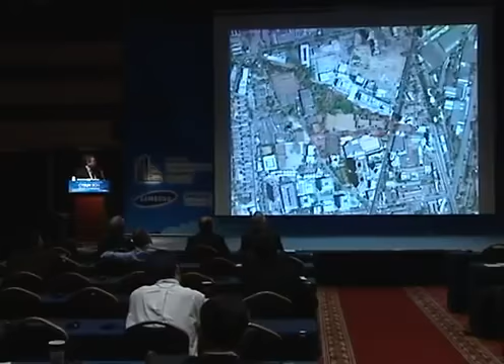As we found our site in early 2009, you can see the mill facilities still there, and indeed, when we walked onto the site only a few days after our client gained access, after closing all of the real estate issues, we found really striking and interesting circumstances, literally left the way it was the last time the place had operated. And of course, visually arresting circumstances of nature and building combined. And the city, of course, had grown around it, thriving, quite dense, quite populated.

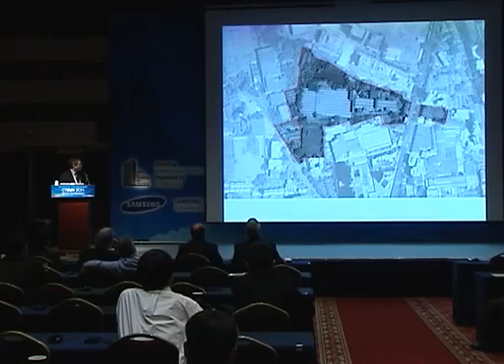And this characterizes the development situation in Mumbai generally, whereby tall buildings are sprouting like weeds amidst former mill buildings, most of which probably have the same fate. Not a lot of organization, not a lot of planning, not a lot of logic to how the city works. And I talk about this because our efforts at building tall buildings deal with structural issues and technology and the engineering of it, but we have a deep commitment that tall buildings have a special responsibility not only to make a statement on the skyline, but actually make a positive impact on the life of the city as they meet the ground.

So this is the site plan for the 17-acre site. The program for the site as we started involved somewhere between 7 and 8 million square feet of building, largely residential, also mixed use, a lot of parking. And what we found as we started looking at this site is that it's extremely well located relative to Mumbai, but it has quite a small amount of frontage actually on streets.

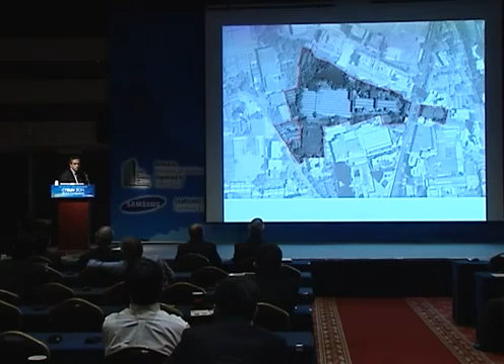And we talked with our client about how to approach this issue and essentially said, well, this is a very good location, but it's not a place. And with our interest of contributing to the life of the city and also utilizing the site quite efficiently and making the most real estate value for them, we actually made one very important move, which was to strike a road or a street or a boulevard across the site, and to say that this is the place, this is actually the identity of the place.

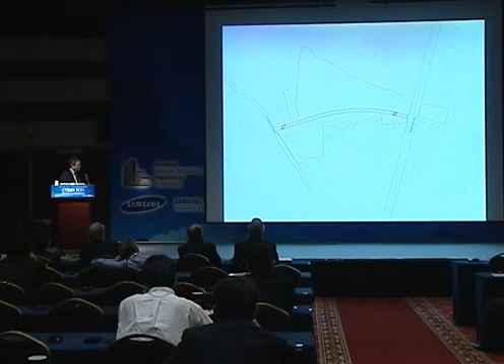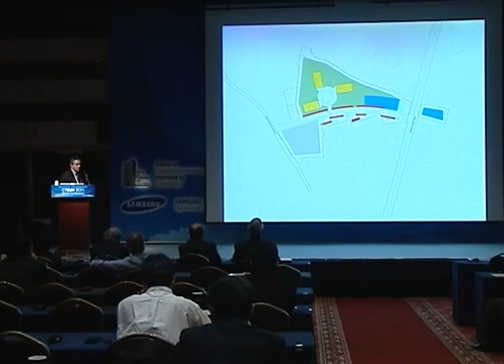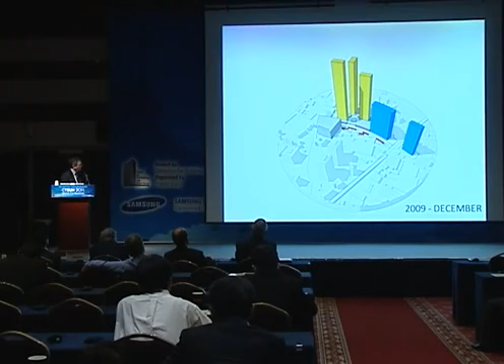What that also does is divide the site very cleanly and very effectively into a zone which can have public uses, parks, retail, street life, active street frontage, and still maintain quite a bit of space necessary for the actual mixed-use development itself. And the master plan, as it completed its initial stage, with the designation of 3 already quite tall residential buildings, a group in yellow, mixed-use buildings in blue, the red indicating retail and street uses, and the green indicating public park.

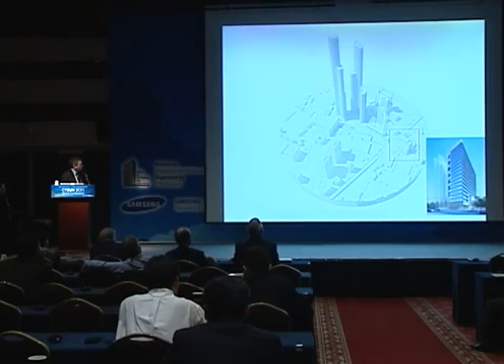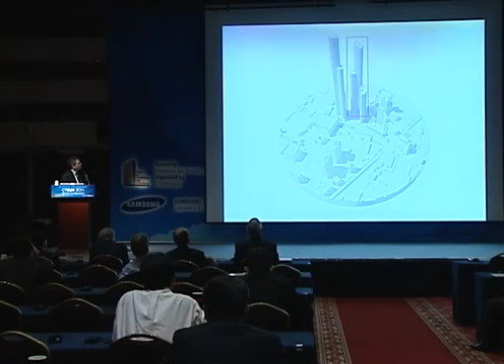Fast forward about a year of design into a variety of buildings, and we still have the beginning of the development of a street life which connects the whole complex to the city, a boutique office building about 250,000 square feet, a mixed-use tower which is currently in schematic design, and of course a group of residential buildings, residential towers, the tallest of which is World 1, which is primarily the subject of

the presentation. But it's important, from my point of view, to go through how the site works and how, in particular, the density of the site required a response that couldn't start with the tall, iconic building that the client wanted to build. It had to relate to something. So how did it get to be the way it looks, and you're seeing in the three-dimensional images more or less the final design which is under construction.

And it's interesting, I think, in the context of Adrian Smith's comments this morning about his interest in the three-leg plan and the sort of lineage through architecture. We didn't start here. We didn't quite back into it, but it was more the confluence of a very dense site which needed to accommodate a whole lot of apartments in conjunction with structure and other kinds of considerations.

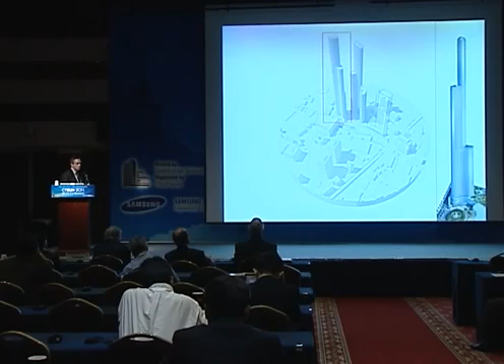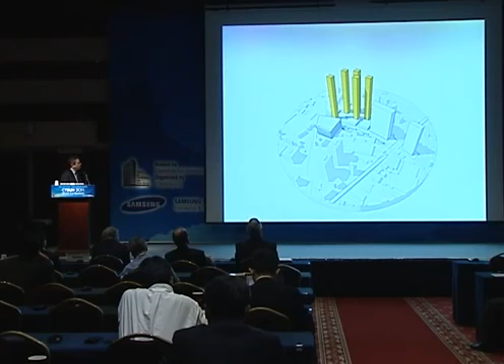Along the way to finding our way to that solution to the residential development in these towers, of course, we looked at different typologies, a typical 90-foot square point tower. We looked at mid-rise, which really wasn't so mid-rise because of the sheer amount of housing that was trying to be put on the site. We looked at mixtures of high and mid-rise, but essentially came back to the answer I think we always knew, which would be that this would be a group of tall towers. Already at this point, also indicating that there was one special and dominant tower among the family of 3.

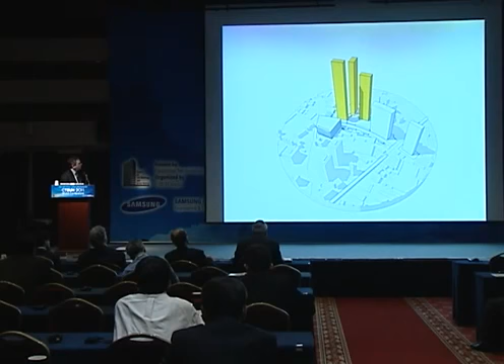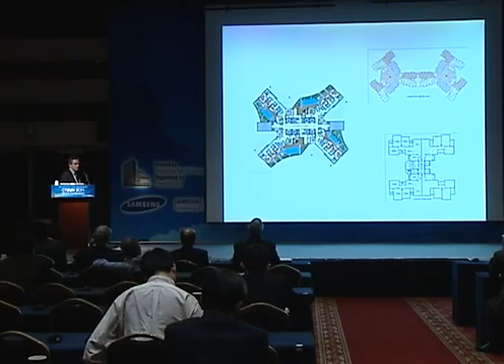Now, to take this diagram, which is a bit generic, and turn it into what it needed to be in the context of Mumbai, we spent a good deal of time looking at some local precedents. These are floor plans from a variety of typical high-rise buildings in Mumbai from the early to mid-2000s, in which we drew a few early conclusions. One was that almost all these buildings were the logical maximum extrusion of lower building typologies. Single groups of elevator banks, no high-rise and low-rise, building aspect ratios, in terms of this one in particular, which couldn't really be extruded any further.

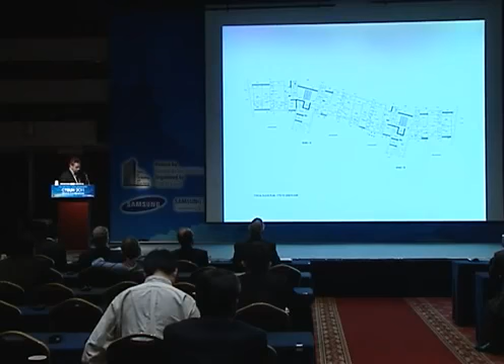We also found, by and large, and this is not a surprise in terms of buildings that are 100% residential usage, that the buildings are designed almost entirely from the inside out. And so there were a lot of aspects of this, knowing the density and the height that we were going to achieve, but also the aspirations of building an iconic building on the part of our client, that we knew could not apply to what we were doing. And so we had to begin to make a new typology within this context, which certainly wouldn't be the kind of typology you would find somewhere else in the world, but also wasn't what you already found here in Mumbai.

But at the same time as we knew that we had to make improvements, we also knew that this inside-out design approach and our clients' and their competition's very clear sense of the residential market meant that we had to look at these quite closely, and that we had to find a number of ways of achieving things that are actually quite desirable about these buildings. Many of them have floor-through units. Many of them have extensive balconies. They're actually, in many cases, quite large units. And so we took these typologies and began to make our own prototype. Generic in terms of what it predicted as architecture, but embodying a number of aspects that we thought would have to carry all the way through.

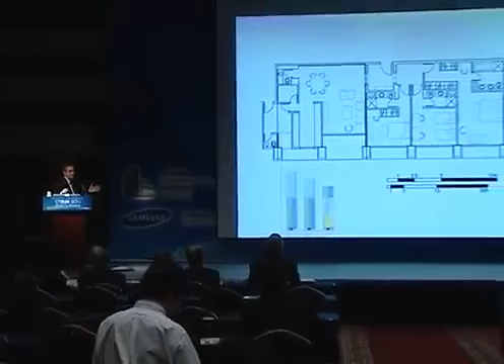The size of the apartment is extremely important. There was a very small range in which the apartments could be judged to be marketable, meaning they had to be at just the right size, just big enough, but not too big to fit certain area ranges.

The buildings that we looked at as precedents almost entirely had bathrooms that were at the exterior, which is fairly typical in Mumbai. Because of the density on the site, we knew we couldn't waste space on the outside, and so we made an early decision that they would be interior, which was, it's not a huge breakthrough, but it is different from what was the norm.

These are high-end apartments, and our client wanted balconies in every single room. Relationships between family and public space, servant space, service, all had to be kind of respected in a way that in most of the super tall buildings we look at, we find a mixture of uses, and that's the way in which shape and appearance begins to be changed from bottom to top. In this case, we had very discrete building elements, and we also had a circumstance in which a taut curtain wall, for instance, was not going to be the solution.

We also knew, and this is sort of the key that started us into actually finding a suitable building form, that these diagrams at the bottom are actually Excel charts, and the pro forma was such that when we started to deploy this on the site, it became clear rather quickly that we needed 6 units per floor at the bottom of at least 2 of these 3 buildings. And so, knowing the size of the units and that we needed 6 of them, we knew we needed 18 bedrooms, 6 living rooms, 6 kitchens and service areas per floor.

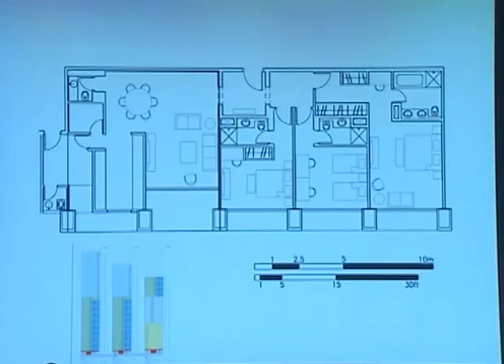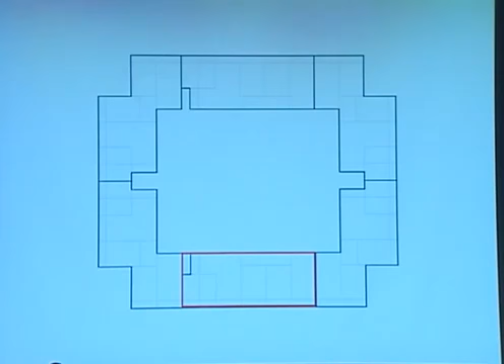And we started to do a kind of calculus where we take that prototype unit in red, start to imagine how cores might work, and they didn't want more than 2 apartments entered from 1 set of elevators, an additional complication. We started to do a kind of calculus of, well, if we need that much perimeter and we have to figure out a logical core, what are we going to do? And of course, that's how, between site and program, we ended up with our 3-leg plan, with an idea that structurally this would also have advantages as we moved forward.

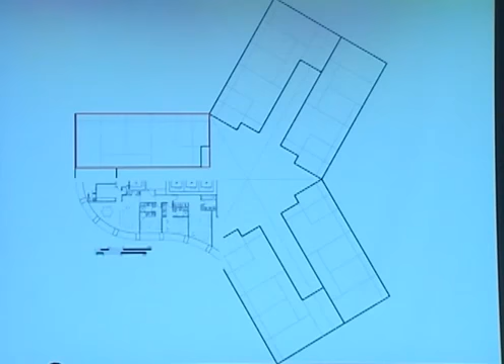And so you can see as we begin to take that diagram and start to put the shape in it that you saw in the building itself. And so we had a scheme, let's say, at least for the plan of the building and the basic volumetrics of the building, but we didn't have a structural scheme yet.

We made the early proposition architecturally that a cage of closely spaced columns at the perimeter with proper connections to the interior was a likely approach to deal with lateral forces and to be consistent with what we needed to do in terms of residential plans. And of course, the strength of concrete normally used in a place like Mumbai isn't particularly high, and those columns at the bottom of the building were quite big. We looked at embedding steel in the columns, which had a very marginal reduction in the size of the columns, and fairly quickly rejected that as an approach for its complexity in construction.

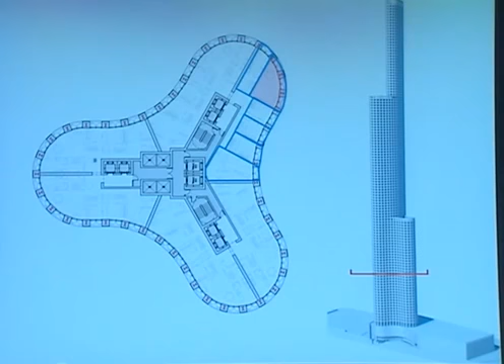But during this time, we also had quite refined the actual unit plans, to a degree that we were quite happy with them, and our client was happy with them in terms of all bedrooms essentially having full-length windows and balconies at their edges, and the payoff of a shape like this, which was that the living rooms and dining areas were at the perimeter.

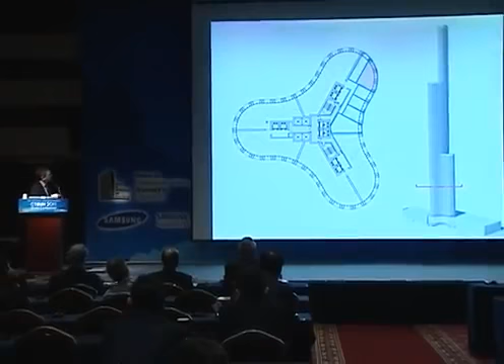Now, of course, none of us liked the two giant columns that were in that living room, and so at this point, we told our structural engineer that they were being too polite and too cautious with us and sort of taking our lead. And I said, you know, forget everything you know about this except the shape of the building and the volumetrics, and what would the perfect structure be.

And we sort of had a sense of what the answer might be, and of course it was 6 mega columns, and Bill can describe this better than I can, 6 mega columns connected to the core in a strategic fashion. But of course, given the calculus that I talked about before in terms of needing a certain amount of perimeter, this was effectively taking 6 bedrooms out of the mix, and so the building didn't work anymore.

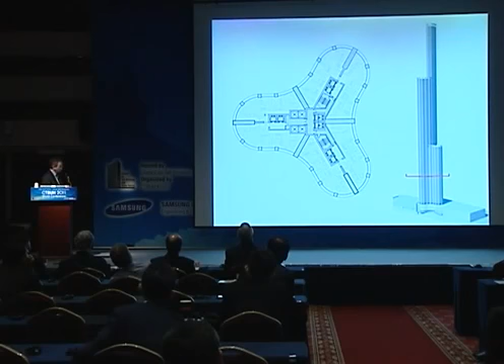And we played with that further, for instance, to say, well, maybe we could configure it a little bit differently. But those are still actually quite large, and we were losing floor area in a place where we couldn't afford to lose floor area relative to residential plans. And so, given these and what we were working with, and you've also seen this sort of evolving in 3 dimensions as I've shown the plan, we started talking about a hybrid system and what the possibilities would be.

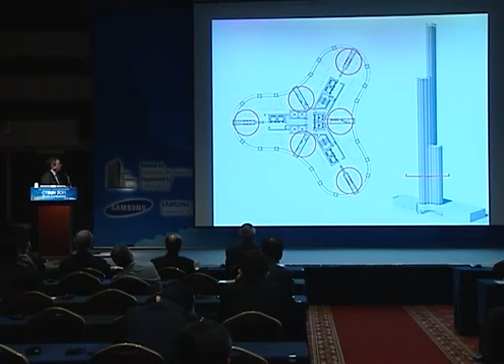I'll go past that. So what we ended up with as an approach that works very well for structure and very well for the apartments is actually a sort of hybrid megastructure in which we gathered 6 columns in the concave surfaces and gathered 3 in the convex surfaces, and we're able to open this area up with a single small gravity column which gets taken out at each tier.

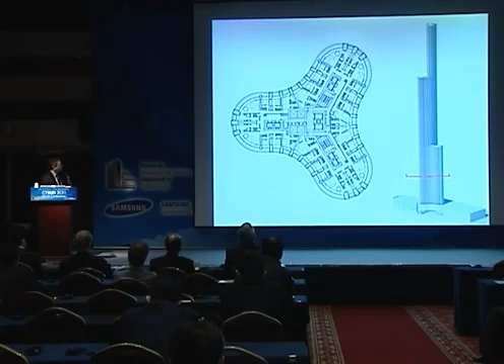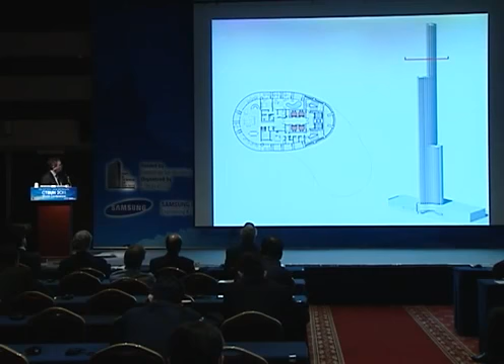The result of that visually for us was quite exciting and quite important in that the gathering of the columns, 6 columns in the concave, leaves one column, the single visual element, which goes from top to bottom in each tier at the inflection point. Tier 2 plan working with the hybrid structure, and Tier 3 in which there are duplex apartments occupying the entire floor plate, and some images of the building where you can see the effect of the gathered columns, the stretch, and the columns at the end, in a way energize and enliven the form in a way that our initial ideas couldn't do. A few more images quickly.

And several views inside and out showing how the living rooms and bedrooms work relative to structure. At the living rooms in the lowest tier, the second tier with larger apartments and a living dining area with a panoramic view, and then at the very top of the building there are, I think, a dozen of these duplex units where the payoff of the structural configuration is especially welcome. And on the skyline, and now for real substance.

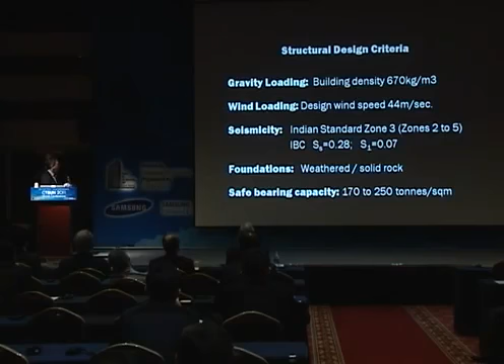Well, I don't know. I thought that was a lot of substance.

Well, Jay has made the premise to you that together we've created a building that works well from an architectural perspective, from a structural perspective, and is well integrated. I think in the last slides he showed you, in some sense the architecture speaks for itself, of course, but let's look and see how well we did. So this is just some basic data that particularly the structural engineers out there can sink your teeth into. The first line basically tells you that in Mumbai, for a variety of reasons, buildings are quite heavy. So you have a really dense, heavy building to start with.

Wind loads are pretty comparable to here, maybe a little windier than here in Seoul, New York, very comparable there. I would say that the speeds that are listed are, by some opinions, conservative. Seismicity is moderate. It's in the middle of the range of the Indian spectrum. And in IBC terms, for those of you who would speak that, you have some data there in terms of IBC. It's more or less, again, comparable to New York, I would say.

In terms of foundations, Mumbai is a mixed bag. It's former islands filled in, so depending on where you are, you have different conditions. But generally, if you go deep enough, you hit really good rock. So we had a combination of weathered rock and then solid rock down maybe 30 meters.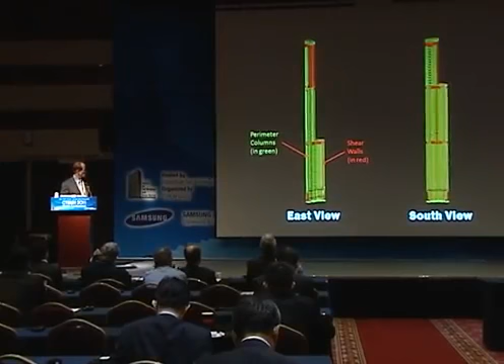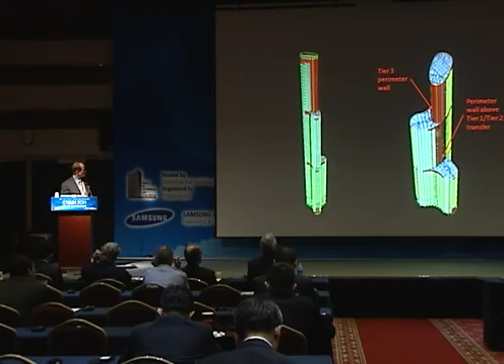In terms of the structural system, some of the images Jay showed you give you a pretty good idea. Here's a few more. Obviously, the grouped perimeter columns. You see some shear walls, which are along the splines, like some of the other buildings you've seen today. Additionally, there are some walls on the perimeter that overlie where the one tier sets back below, on the tier below. Not as well organized as some other buildings, but still a system that allows us to deal with the stresses that occur at those intersections.

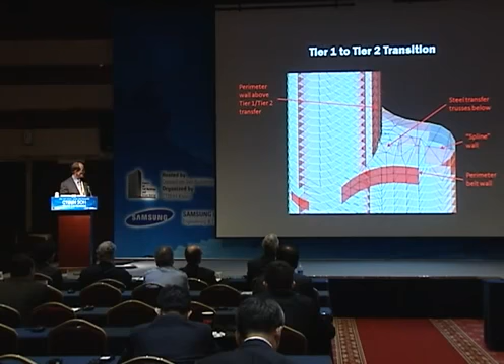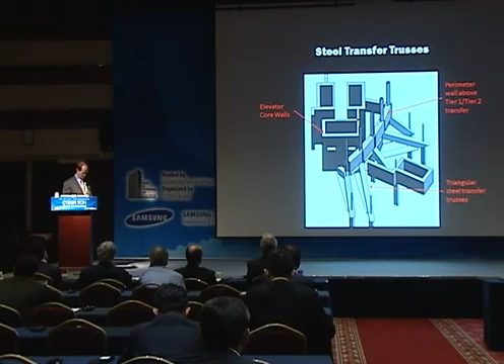Here's the more difficult one, the tier 2 sitting on tier 1, and we'll just go inside a little bit because the wall that goes across the top of tier 1 is transferred out by a series of simple 3-piece trusses, steel trusses. We try to use as little steel as possible in the Mumbai market. It's seen as a significant premium as well as something that the local contractors at least do not have a lot of good experience with.

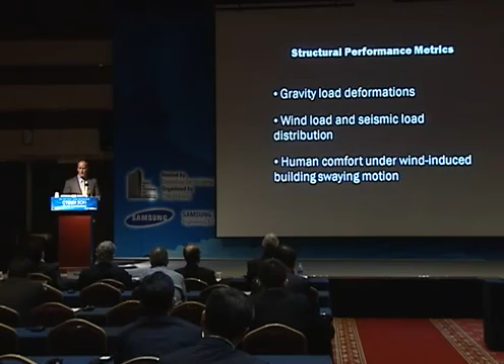In terms of the metrics for how we did, I thought these were some of the more important ones. In a tall building, as others have said today, obviously keeping the differential shortening of the individual columns and walls to a minimum is an important consideration. Dealing, of course, with the wind and seismic loads, and then achieving the requisite level of human comfort in the wind.

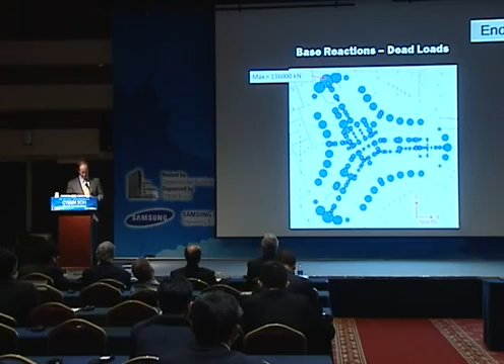In terms of the magnitude of the load, the most heavily loaded column under gravity is 136,000 kilonewtons. That will be a reference point for these other slides. Now, if we look at the wind, you see a pattern which represents that the whole of the building is acting together. You see the peak stresses, the blue, the largest compressive stress due to wind, and the white circles, the largest tensile stresses due to wind alone, are at the perimeter, and there's again a relatively gradual distribution between the perimeter and the middle and to the other side.

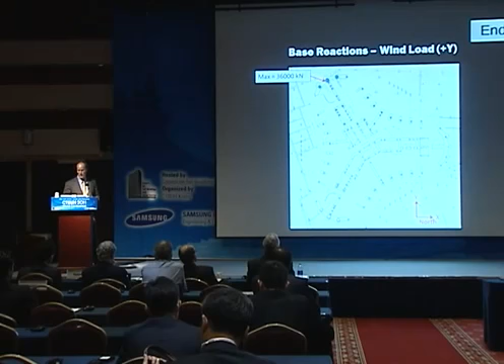The magnitude of the wind load now 53,000 compared to the 136,000 you saw on the prior slide. So the wind loads are large, but there's no tension at the bottom of the building. Same thing, different wind direction, same sort of conclusions. In terms of seismic, another point of reference in terms of the numbers, 24,000 kilonewtons. So as with some of the other buildings shown here, in a moderate seismic zone, the wind load is basically double the seismic excitation.

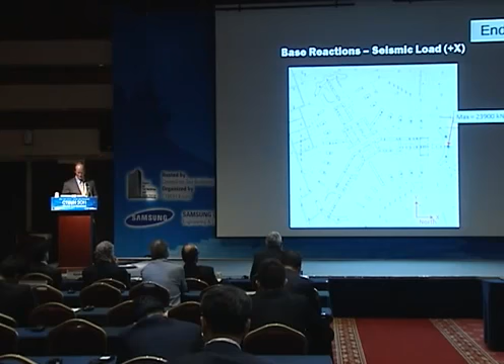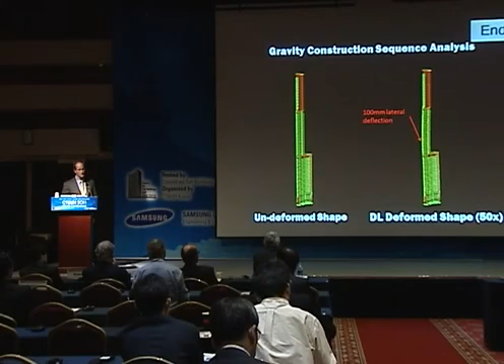In terms of the deformations of the building under its own weight, this is the results of a construction sequence analysis where, as is typical, you generally get the largest degree of lean in the building associated with differential effects at more or less partway up the building. 100 millimeters is not a bad value in my opinion.

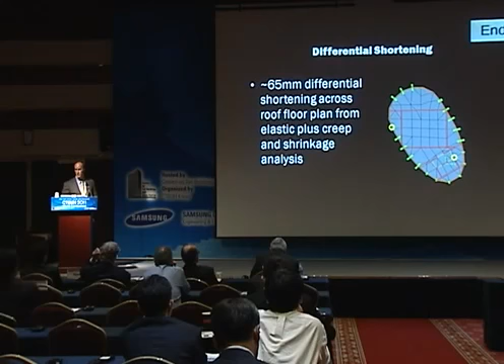In terms of differential shortening between individual columns, if you go to the roof and look at the relative values, the greatest difference is between the 2 points circled, which are a significant distance apart, and the differential, including all long-term effects, is 65 millimeters. So again, I think a quite acceptable result. In terms of wind load deflections, a relatively normal degree of stiffness has been achieved. The deflection is the height over 495.

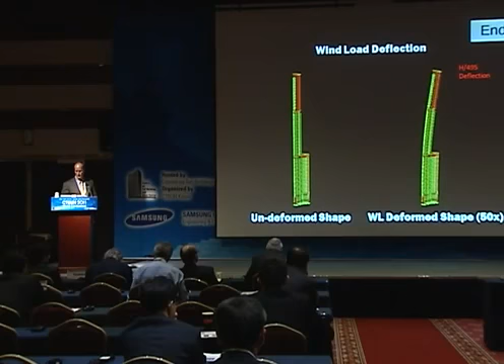In terms of the accelerations, we did result in the need for a supplemental damping system in the building. You can see from this chart that the periods are relatively low, so despite the heavy weight of the building, it is quite stiff. Despite that, we did need a supplemental system, and the building will have a sloshing water damper system, which seemed to be the right solution for the Mumbai market.

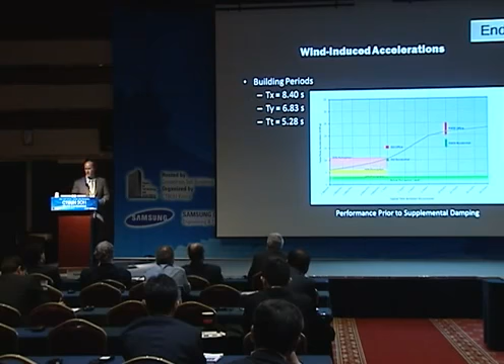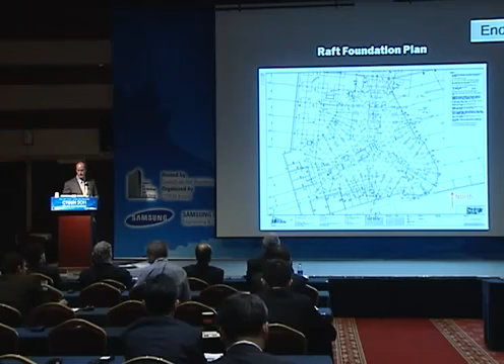Our last two speakers